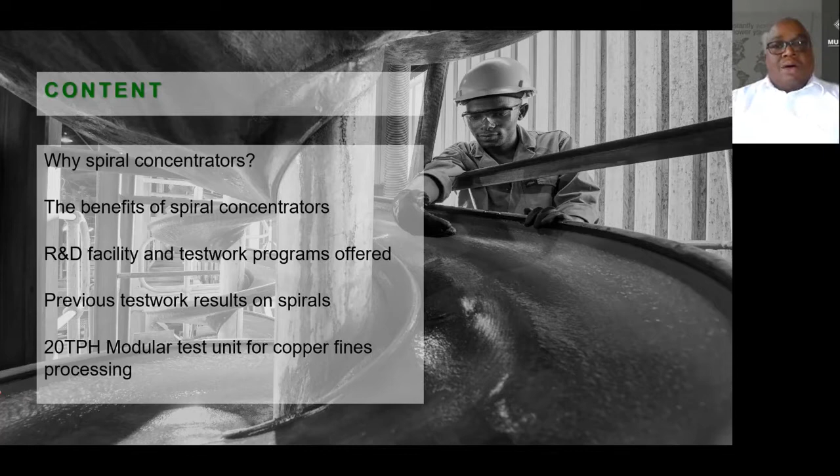Okay, on this slide, basically what I'm trying to say here is that spirals are used where there is a difference in specific gravity between the mineral of choice and the unwanted gangue. So in that case, you are able to utilize spirals. And at Multotec, we have a wide range of spirals that will suit your application. For copper processing in particular, we have the SC20 and the SC21 spirals.

The SC20 we use in the rougher and scavenger application, and the SC21 we use in the cleaning operation. In some cases, we also use the HX5, which is a large diameter spiral, and depending on feed grade as well as the PSD of the material, we might select that spiral. All of these spirals are available as either twin or triple starts for increased throughput.

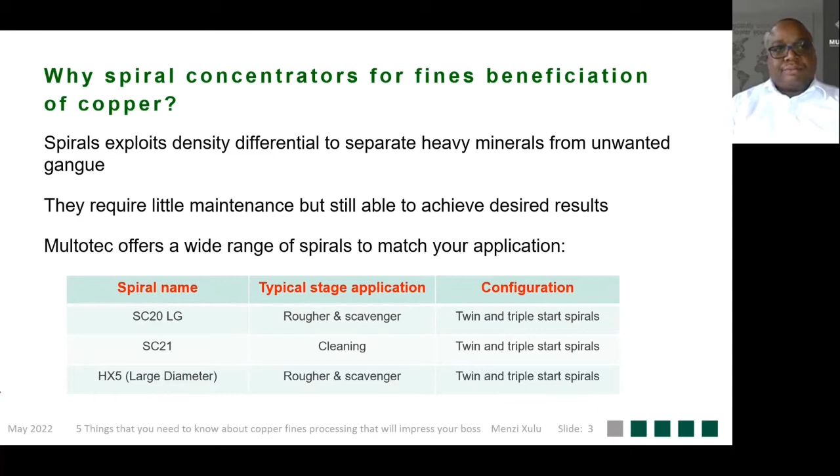Okay, here we're going to discuss the benefits of using spirals for copper processing. Number one, we use spirals mainly for bulk rejection. Usually the natural and crushed fines contain about 20 to 25% of fines as a percentage of run-of-mine. And from previous test work, we have seen that we can reject up to 80% of mass of gangue-containing minerals to tailings. This has the benefit of reducing the size of expensive equipment, such as your leach tanks, flotation cells, and so forth.

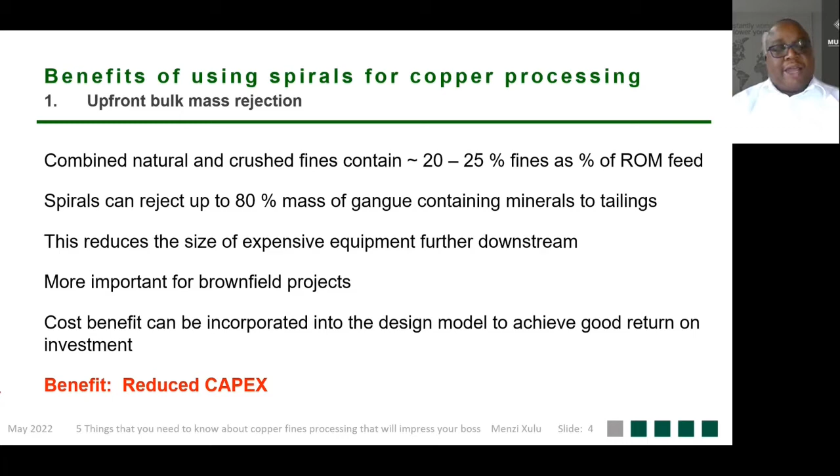And it's most important for brownfield projects where the cost benefit can be incorporated into the design model in order to achieve a good return on investment. So here the benefit is reduced capex. That is very key. Number two, spirals can be used for pre-concentration of copper to sellable products.

Usually in this case, we use a 4-stage circuit that consists of roughing, cleaning, as well as scavenging. And we have in the past managed to upgrade malachite in Zambia from 3% copper in the feed to about 20% in the final concentrate by utilizing spirals. The benefit of pre-concentration is that it reduces the cost of reagents and downstream processes.

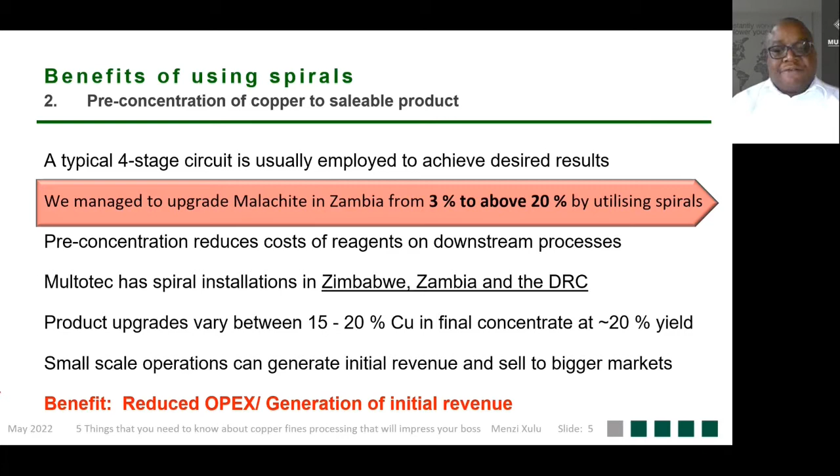At Multotec, we have installations in Zambia, Zimbabwe, and the DRC, where we have seen that the product upgrades can vary between 15 to 20% copper in the final concentrate at about 20% mass yield. Usually this is most applicable for small-scale operations where initial revenue is of importance, and the copper concentrate can be sold to bigger operations for initial revenue. The benefit of pre-concentration here is to reduce OPEX, like I've already mentioned, on reagents, and it can generate initial revenue on the fines circuit.

So now, we have an R&D facility at Multotec where we offer full-scale pilot testing on different types of spirals that are applicable for copper processing. We work with the client in defining the scope to suit your process requirements. From there, the test work results are used to confirm the selection, because we might have to do comparison test work on which type of spiral is suitable for your application. We also use the data to set up a mass balance of the circuit and to issue process guarantees.

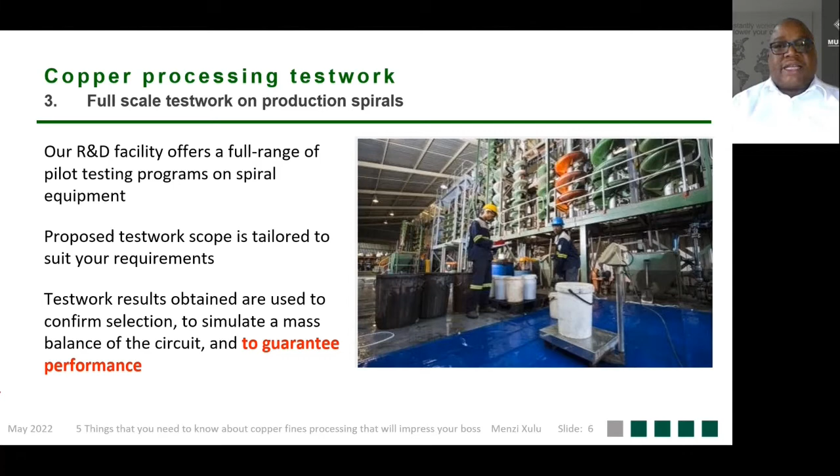Here in this slide, I'm showing you a typical pre-concentration flow sheet for copper beneficiation. Ideally, this is an upstream process that involves crushing, screening, scrubbing, a DMS circuit, and lastly, a spiral circuit. What I want to mention here mainly, and which I will also mention at a later stage, is that the top size on the jaw crusher as well as the cone crusher is important for liberation purposes. That is why it is important to understand the mineralogy of the ore you are treating, because that has an impact on downstream processing, such as the spirals.

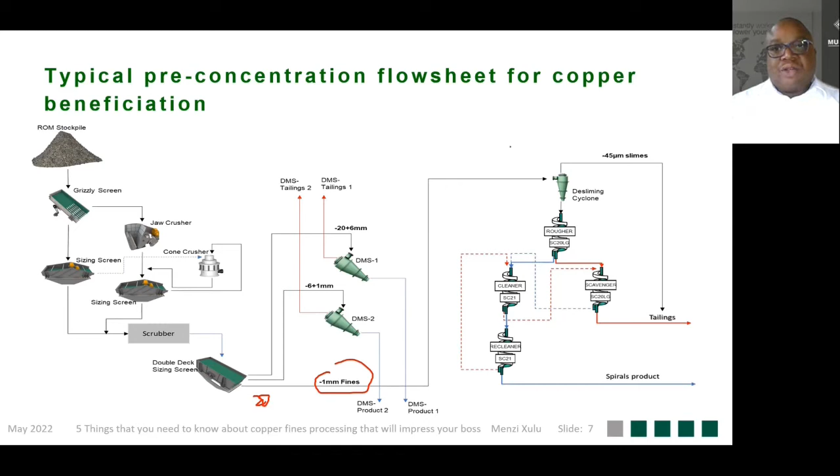In this case, the -1 millimeter fraction that you see right here at the end from a double deck sizing screen usually contains about 20% mass from the run of mine, which is then fed into the gravity circuit.

Typical examples where we have run test work on samples, we have shown that we can actually produce a sellable product containing 20% copper from a feed containing only 2.4% copper. And here I'm showing you a grade recovery profile, which shows an inverse relation between recovery and grade as expected, where it is clear that if you want to achieve a 20% product grade in the final concentrate, you will have to give up a certain portion of recovery.

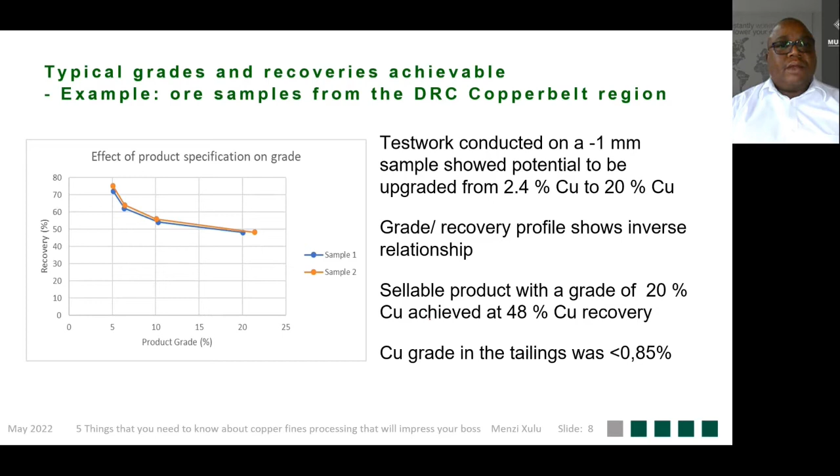So in this case, we were able to produce a sellable product of 20% copper, and this was achieved at a 48% copper recovery. And the copper grade in the tailings was less than 0.85%. On this example, we have a 3-stage circuit, where the aim of the test work was to ascertain the upgradability of the ore to spirals processing. And we are utilizing SC20 LG spirals.

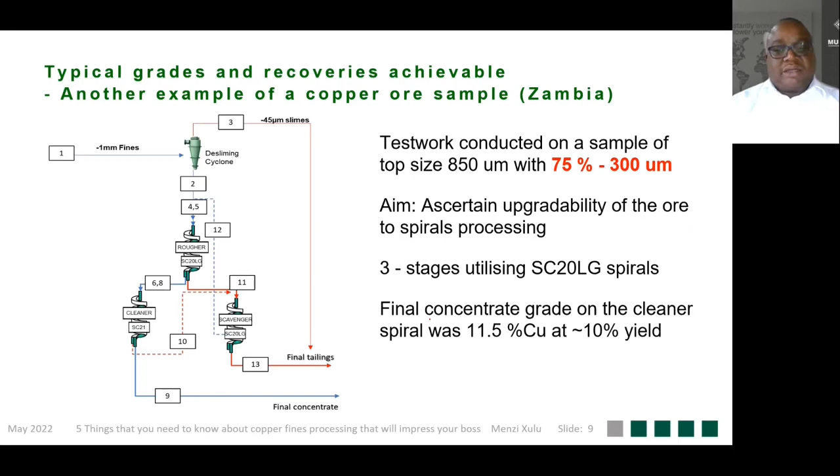And we're able to show that on this circuit, we can produce a product with 11.5% copper at a mass yield of 10%. However, there's a few things that I need to mention here. Unlike in the previous circuit where we're using a 4-stage circuit and we're able to get a 20% copper in the final product, in this case, we were only able to get about 11.5 at a mass yield of slightly less than 10%. So we're upgrading from 2.4 to about 11.5%, and we were able to reject 90% of the mass.

Now, the big question here is, how likely is it to move from 11% to about 15 or even 20% when we now have only 10% of the mass? The answer is very simple, highly unlikely. And is that a viable option now to produce a sellable product from here? The question lies again in the mineralogical analysis of the sample, because from this ore, it is clear that this ore is hematitic in nature. It contains a lot of iron-containing minerals. So in this case, it is not easy to upgrade the copper beyond 11.5% without removing the Fe, which then requires the Fe to be removed magnetically.

So in this particular case, perhaps it is better to use this scenario as a bulk rejection, because we have seen that we can reject about 90% of the mass while upgrading the ore from 2.4 to about 11.5%. So it is important again that when you're dealing with the fines, you also do a mineralogical analysis of the ore. In this case, you can do even a qualitative analysis involving XRD.

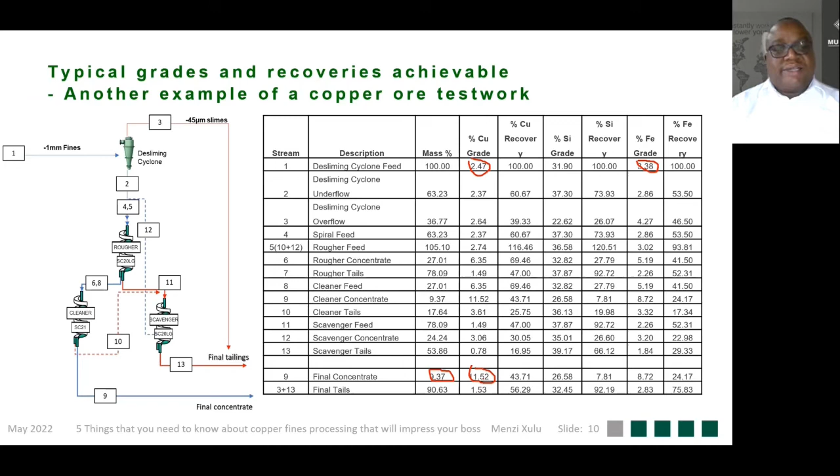Okay, number 4, we have a 20 ton per hour modular test unit that we utilize for testing on site. This test unit can be configured into a maximum of 4 stages of processing and will produce a concentrate and a tailings product. It's a simple unit which is fitted with interchangeable spirals, and piping can be rerouted to suit your plant or process requirements. It's very easy to move around. It can be loaded into a container or onto a 12 m flatbed truck, and can be moved from one site to another for testing purposes.

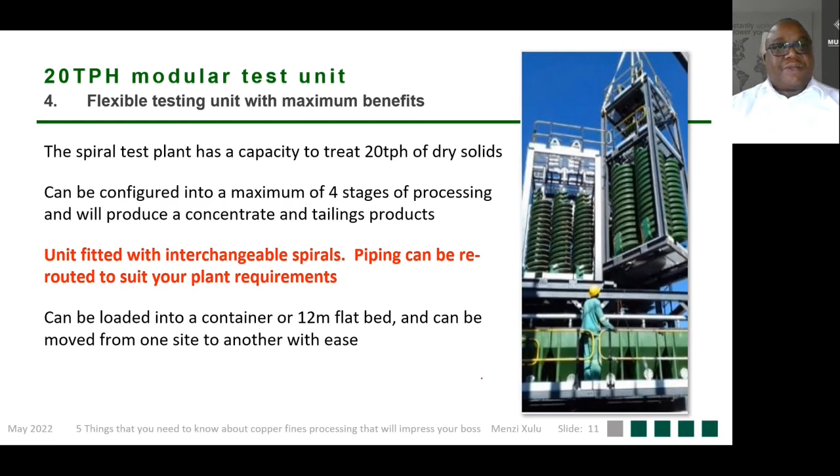However, for small scale miners or for low scale operations, this unit can also be used in producing a final concentrate that can be sold to bigger markets. So that's the advantage of it. So there is a guaranteed return on investment on this unit, and the estimated return on investment can be obtained within a 1 year period of operation. So like I've said before, it is a unit that can be used to generate initial revenue, and it's very simple to use. And it can also be utilized in pairs, and thus can handle more throughput for large applications.

As I've shown you in this picture, we have 2 pilot plants or modular plants working in pairs. Each unit has a capacity of 20 tons. So in this picture, we have a modular unit that can handle a throughput of 40 tons per hour. And therefore, we are able to generate even more revenue by utilizing this unit in pairs. So this is a total solution for your copper fines that requires very little maintenance, and yet we are able to achieve results.